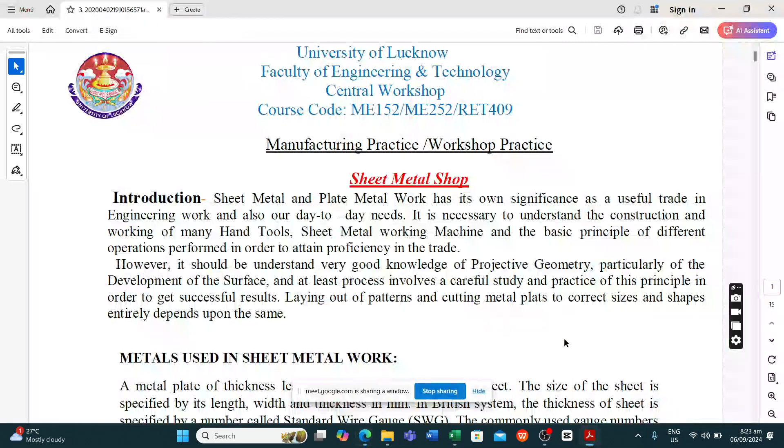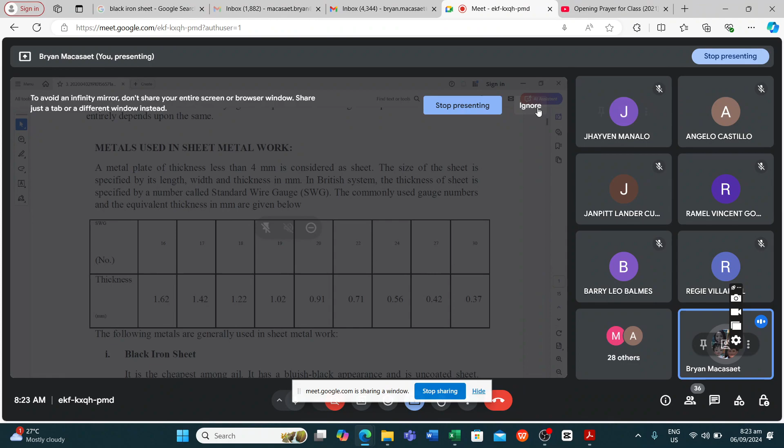So a metal plate of thickness less than 4 mm is considered a sheet, as we discussed earlier. The size of the sheet is specified by its length, width, and thickness in mm. The thickness of the sheet is specified by a number called SWG, or the standard wire gauge. The commonly used gauge numbers and their equivalent thicknesses in mm are given below. As you can see in the picture, the gauge numbers are 16, 17, 18, 19, 20, 22, 24, 27, and 30, and the equivalent thicknesses are 1.62, 1.42, 1.22, and 0.37.

So what did we say last meeting - the higher the number, the thicker or the thinner?

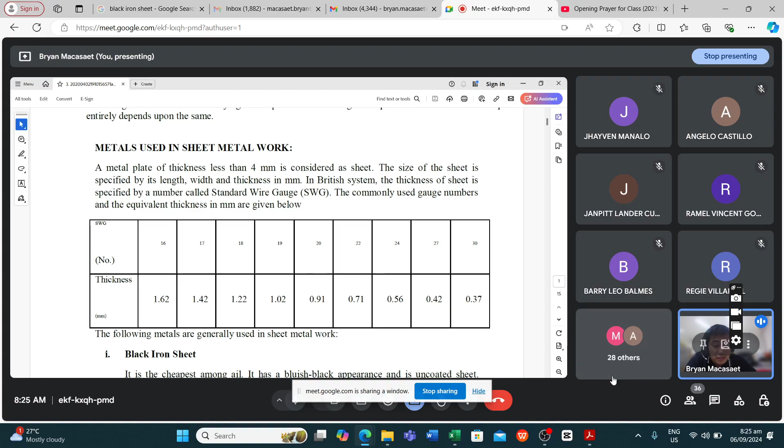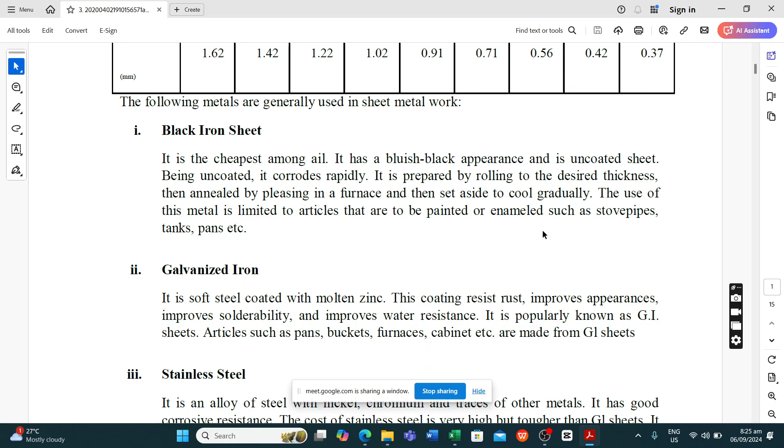So black iron sheet is the first of the following metals used in sheet metal work. When we say black iron sheet, it is the cheapest among all. It has a bluish black appearance, hence the name, and is an uncoated sheet. Being uncoated, it corrodes rapidly, so it is prepared by rolling to the desired thickness, then annealed by placing in a furnace, and set aside to cool gradually. The use of this metal is limited to articles that are to be painted or enameled, such as stovepipes, tanks, pans, etc. Let me show the picture of black iron sheet.

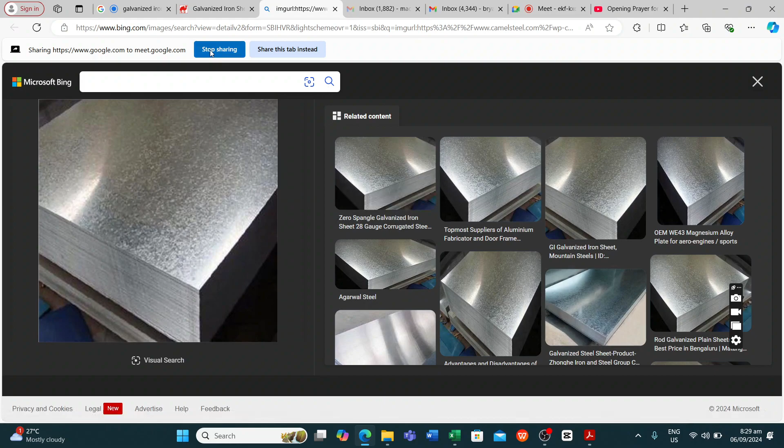Okay, next. So after galvanized iron, we have stainless steel. Okay, someone is raising his hand. Mamaya na yung mga late ha, mamaya ako mag-check ng attendance para sa inyo. Okay, stainless steel. It is an alloy of steel with nickel, chromium, and traces of other metals. It has good corrosive resistance. The cost of stainless steel is very high but tougher than GI sheets. It is used in kitchenware, food handling equipment, and chemical plants.

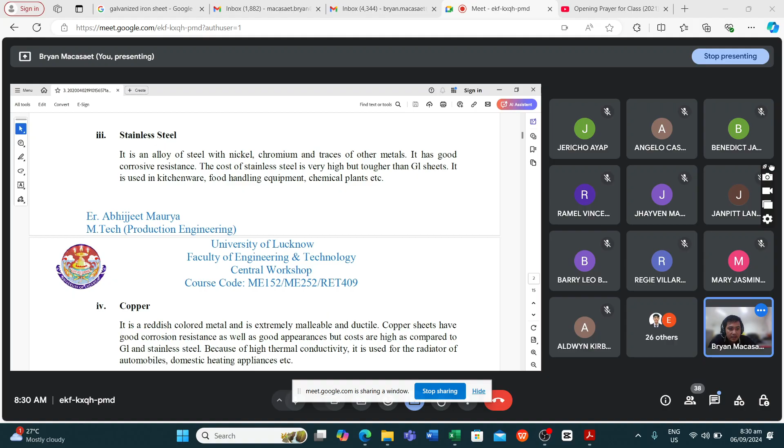Okay, so copper, napakita ko na rin sa inyo nung last meeting, di ba? No? So copper is a reddish-colored metal and extremely malleable and ductile. Copper sheets have good corrosion resistance as well as good appearance, but costs are high as compared to GI and stainless steel. Because of high thermal conductivity, it is used for the radiator of automobiles, domestic heating appliances, etc.

Next, we have aluminum, or aluminium in other spelling. Aluminum cannot be used in its pure form, but it is used in alloy form. Commonly, additions are copper, silicon, manganese, and iron. It has many qualities like high ratio of strength to weight, corrosion-resistant qualities, ease in fabrication, and whitish color. It is used in manufacturing a number of products such as refrigerator trays, household appliances, lighting fixtures, window work, construction of airplanes, and in many electrical and transportation industries.

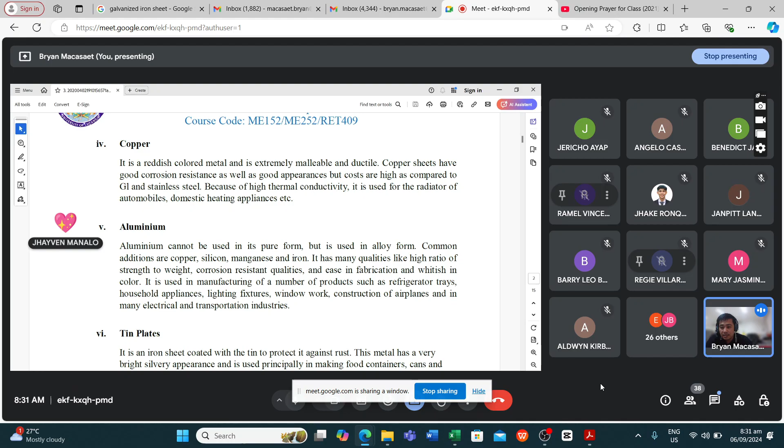Okay, thank you, Jhayven. Next, we have tin plates. The tin plate is an iron sheet with tin to protect it against rust. Its common applications are in cans, food containers, and pans. And then lead. It is very soft, malleable, low melting point, and possesses high resistance to acid corrosion. It has low mechanical strength, so it is used to provide lining to highly corrosive acid tanks, and is also used in radiation shielding.

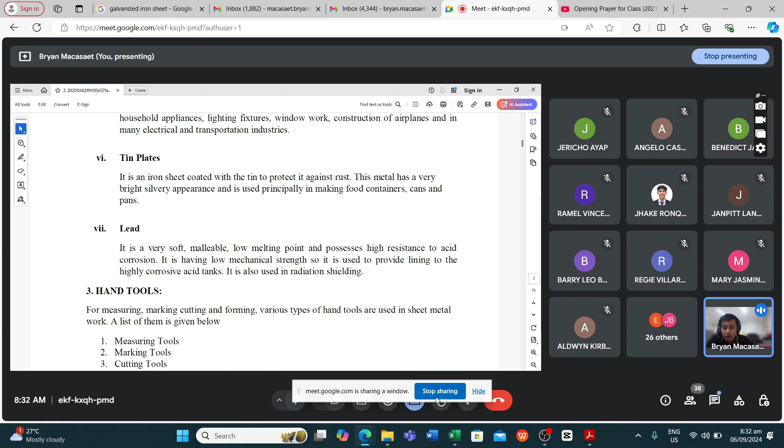Okay po, so let us look at the pictures of the sheet metals I mentioned. Okay, saan tayo natapos? Stainless steel, ano? So I will be showing you the image of stainless steel.

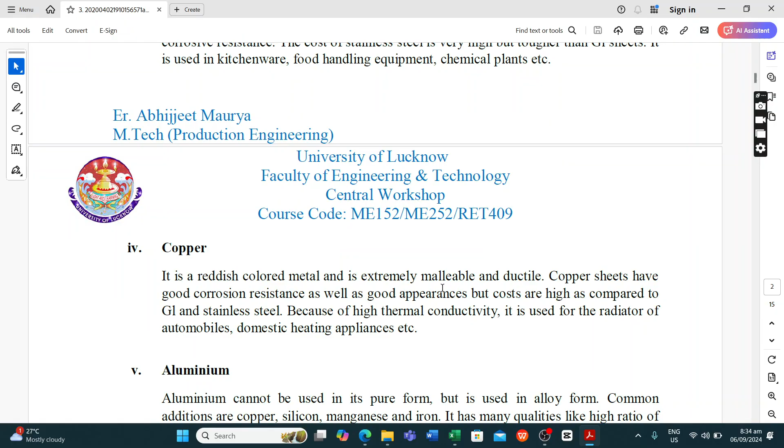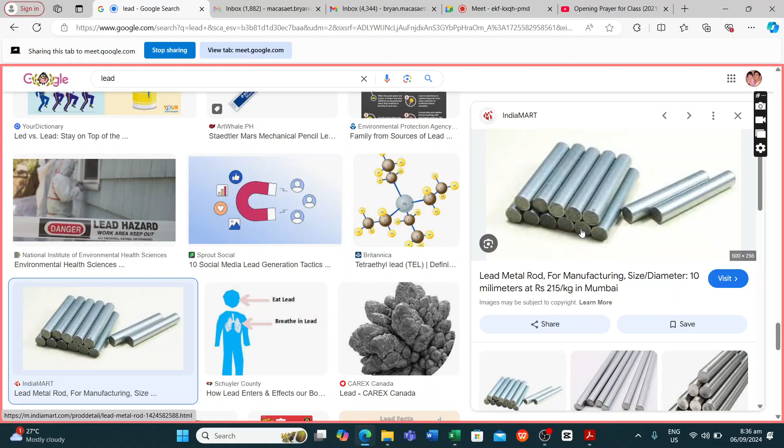Okay po. Okay pa, so do you have questions on metal types used in sheet metal production?

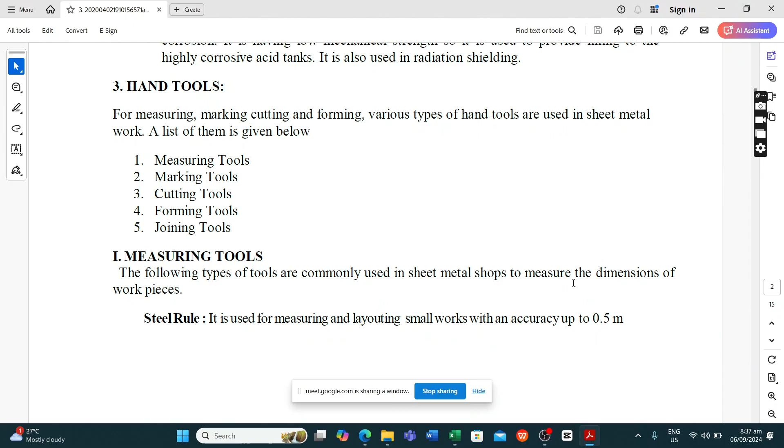Okay, so we will now proceed with the next topic, which is the use of different tools. So in this section, we will be studying the different types of tools that we use in sheet metal works. This hand tools is also somehow connected to introduction to automotive technology, kasi meron sa component natin ng ating course information syllabus ay kasama ang hand tools. So for measuring, gagamitin din ang hand tools, especially for marking, cutting, and forming.

So we use several types of tools. Various types of hand tools are used in sheet metal work as listed on its type and functions. So syempre, hand tools differ for its intended purpose. Okay? So syempre meron tayong measuring tools. Measuring tools are tools used to measure dimensions of an object, for example, the length, the height, and the width of materials.

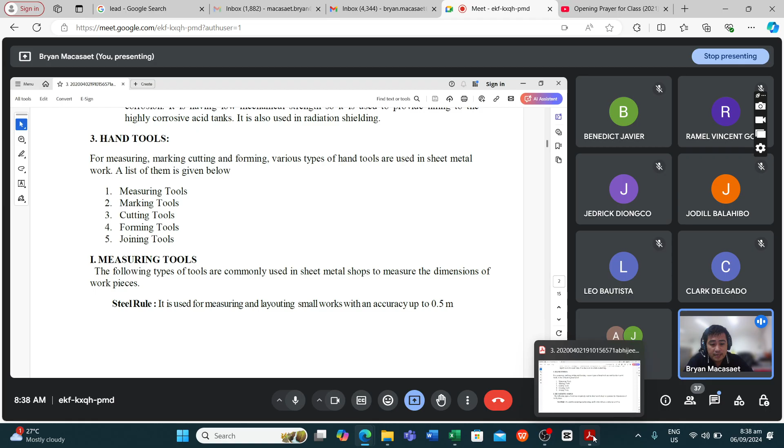So for example, initially sa plano or sa pagko-construct ng project, measuring is the first. After layouting, measuring ang sunod. Number 2, marking tools. Then number 3, cutting tools. Number 4, forming tools. And last is joining tools. Okay? So isa-isahin natin. The first one is the measuring tools.

Okay, from the word itself, measuring. It is a tools commonly used in sheet metal shops, used to measure the dimensions of work pieces. So meron tayong iba't ibang uri ng tools that we use for specific materials or components. Okay, the first measuring tools is what we call steel rule.

Ang iba ng tawag sa steel rule? Anong tawag niyo sa steel rule? Simple, ang ibang tawag ruler. Pero pagka steel rule, parang L shape. So it is used for measuring at layouting small works with accuracy up to 0.5 millimeter. Okay, ito yun, steel rule o ruler. Siya ay ruler made of steel.

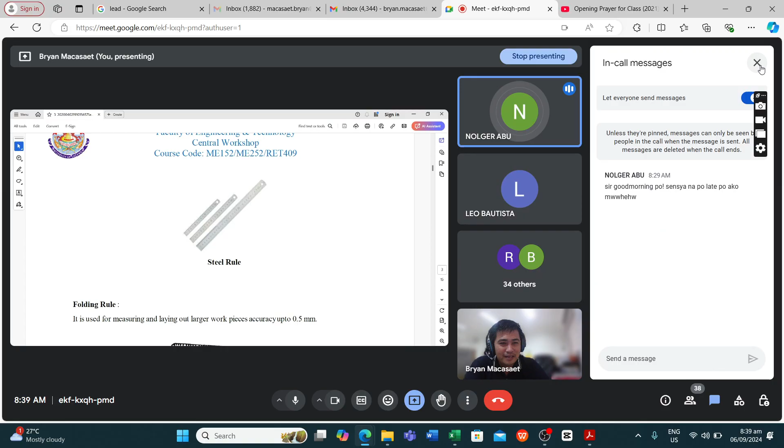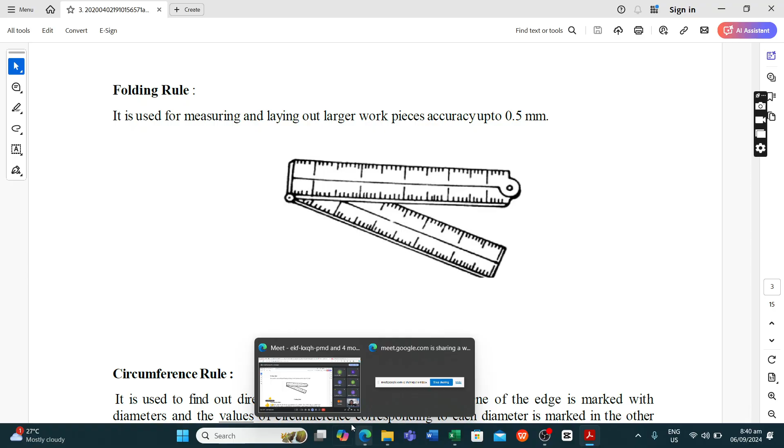Okay, number 2 is folding rule. Look at the picture. So this is used for measuring and laying out larger work pieces, accuracy up to 0.5. As you can see yung folding rule, okay, from the word itself, folding, nafo-fold yung ruler. So bakit kaya may folding rules?

Share his idea. Why do we need to use folding rule? Sige nga, Mr. Nolger Abu, can you explain the function of folding rule? Bakit may folding rule pa? Siguro po, sir, ginagamit po yan pag may pinagsulukan, sir. Yes, tama. Ganun po, anong gagawin sa pinagsulukan? Gagawa ka ng patayo at pahigang linya, so parang T-square. Opo. Okay, thank you, Nolger.

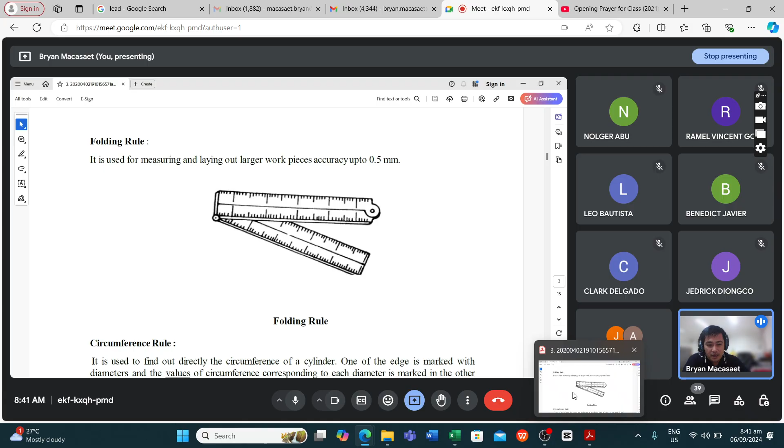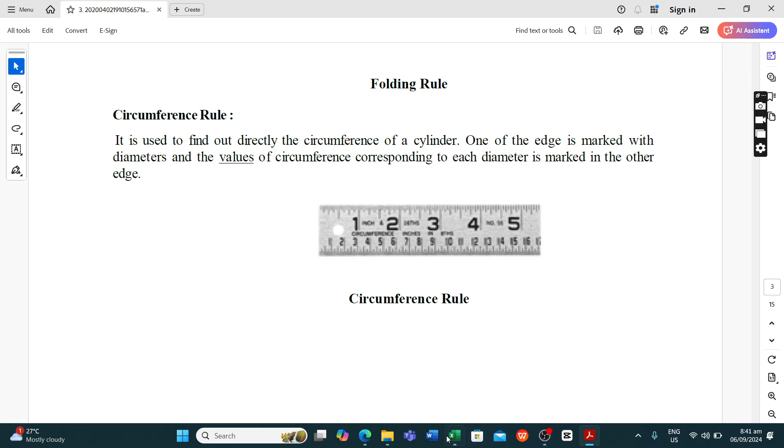Next, we have the circumference rule. It is used to find out directly the circumference of a cylinder. One of the edges is marked with diameters, and the values of circumference corresponding to each diameter is marked in the other edge. As you can see in the picture, yan yung circumference rule, pansukat na diameter ng cylinder. Okay po. So far, can you follow?

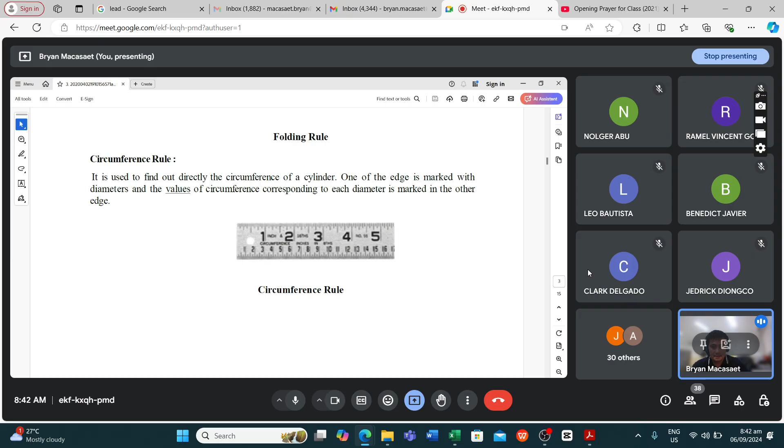Okay, next. May tanong sa circumference rule? Wala po. Next, we have the vernier caliper.

Okay, yan yung ating vernier caliper. As you can see in the picture, it is used for measuring dimensions. Also, it has corresponding parts. Kita ba yung arrow ko na gumagalaw? Ito ay ginagamit to measure depth, lalim.

Ito namang isa, yung nasa taas, it is used to measure internal diameter, ibig sabihin panloob. At itong dalawang ito naman, it is used to measure outside diameter. Nakuha?

Nakuha po? Opo. Ito ay outside diameter, ito ay inside diameter, ito ay depth. Ano pag sinabing depth? Lalim. At dito binabasa yung measurement.

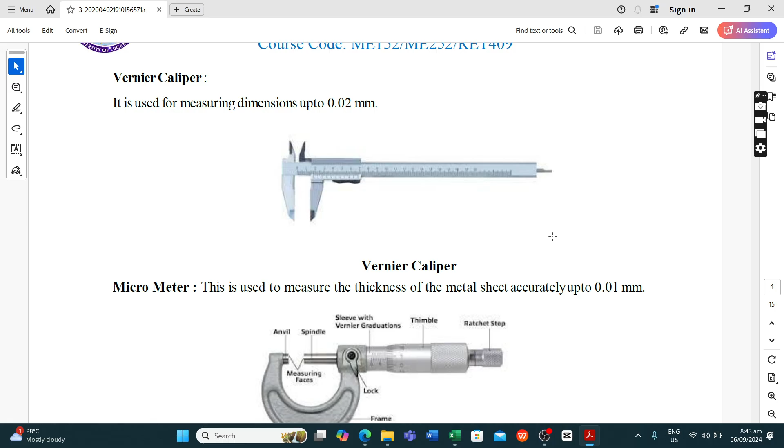Magiging activity natin siya sa hand tools o sa introduction to automotive engineering technology. Ngayon ay theoretical lang, description lang muna. Okay po, nakuha ang vernier caliper. Ibig sabihin ang vernier caliper ay may three dimensions na minimeasure: inside diameter, outside diameter, at depth o lalim.

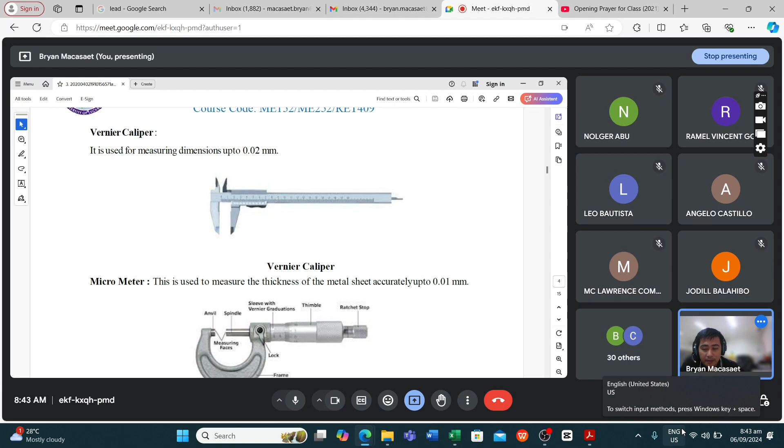Okay, next we have micrometer. This is used to measure the thickness of the metal sheet accurately up to 0.01 mm. Ito lang ang minimeasure niya, yung kapal ng metal.

Meron siyang several parts: anvil, spindle, measuring faces, sleeve with vernier graduation. Dito naman binabasa yung reading. Kita ba yung arrow ko?

Dito nilalagay yung minimeasure, at ito yung ratchet stop, at thimble. May tanong po sa micrometer?

Wala po. Micrometer is used to measure outside diameter lang.

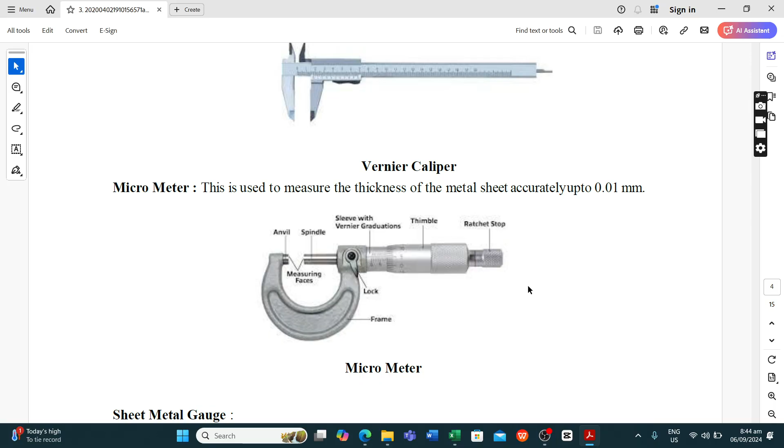Okay, next we have sheet metal gauge. It is used to measure the thickness of the sheet metal. Meron siyang various thicknesses, from 1 to 30.

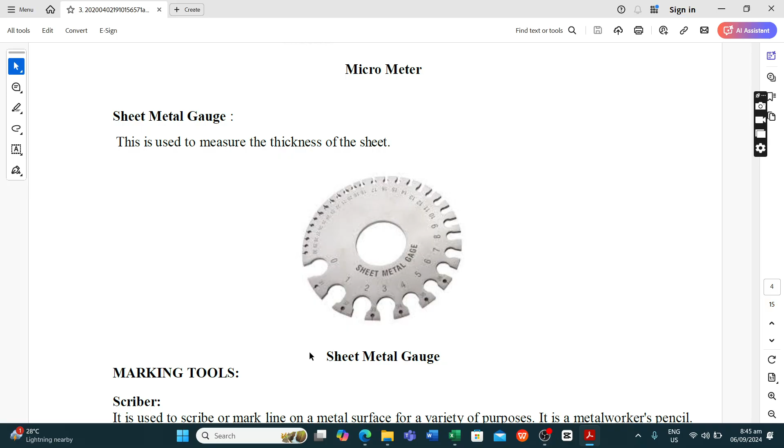Dito makikita yung kapal. Dito isisingit yung sheet metal para ma-measure yung kapal. Ito yung sheet metal gauge, from the word itself, it is used to measure the thickness of the sheet, kapal ng sheet.

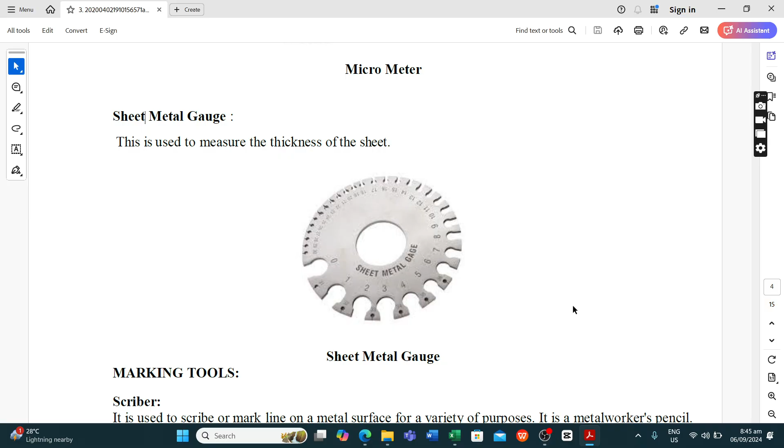May tanong sa sheet metal gauge? Okay, thank you for the response. Next, we have marking tools.

From the word itself, it is the tools used to mark an object by putting a line or scribing the surface of a material. It is used to scribe or mark a line on a metal surface for a variety of purposes, a metal worker's pencil. Kumbaga, siya ay pang mark o pang tanda.

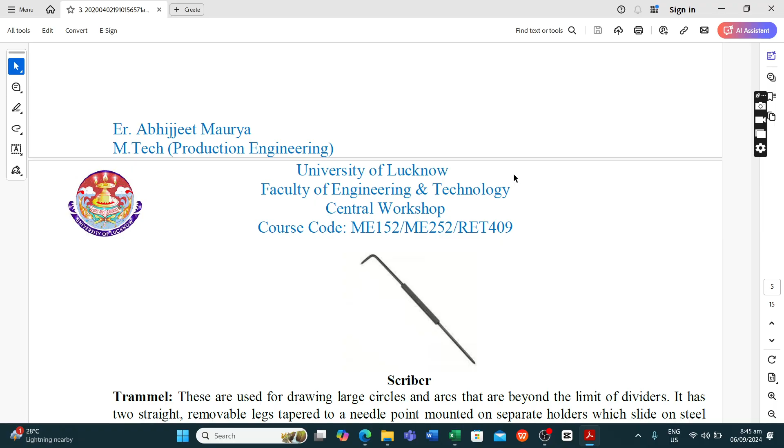Ano, the first one is the scriber. Ito yun. Sunod, yung tinatawag nating trammel, ito yun.

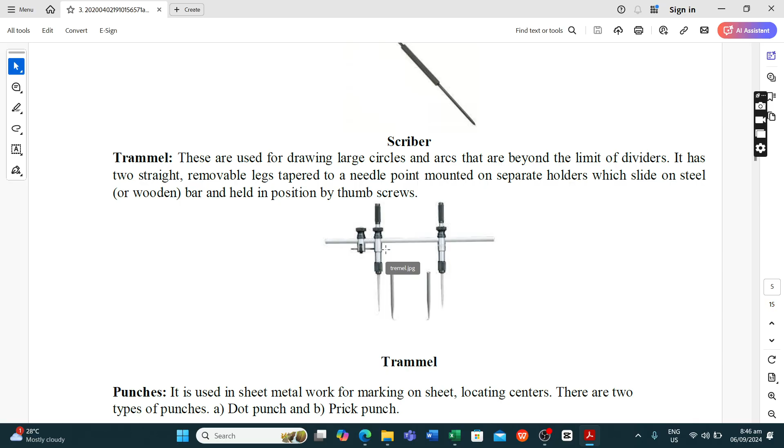Ang trammel ay used for drawing large circles and arcs that are beyond the limit of dividers. It has two straight, removable legs tapered to a needle point, mounted on separate holders which slide on steel or wooden bar and held in position by thumb screws.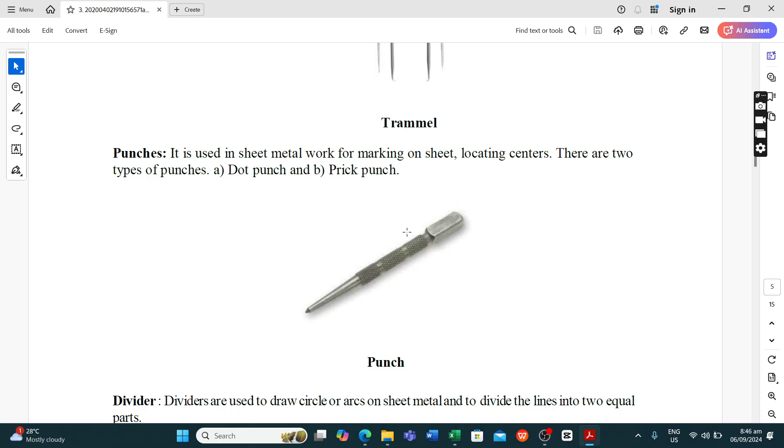Next, punches. Ito naman yung punches natin. It is used in sheet metal work for marking on sheet, locating centers. There are two types of punches: the dot punch and prick punch.

Next, divider. Dividers are used to draw circles or arcs on sheet metals and to divide lines into two equal parts. Ang dividers, kung tayo nung elementary at high school, parang compass na ginagamit sa paggawa ng circle at paggawa ng arcs.

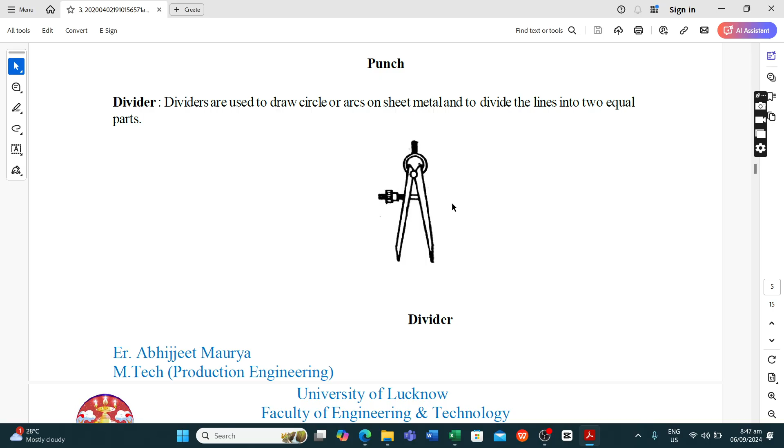Questions? Wala po, wala na po. Madali lang naman yung topic, kaya for sure wala naman kayong masyadong tanong.

The next one is what we call cutting tools. It is used to cut sheet metal as per the pattern drawn and to make holes for rivets. The following types of tools are used.

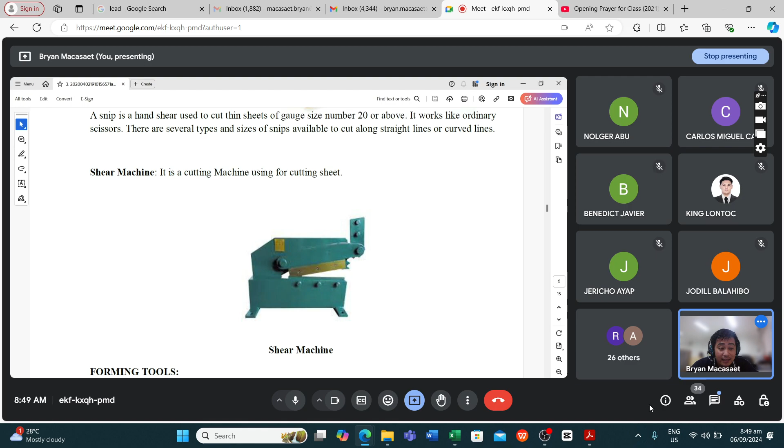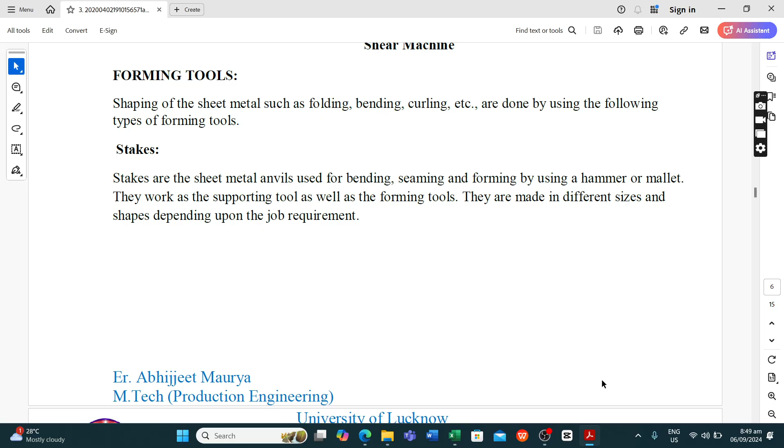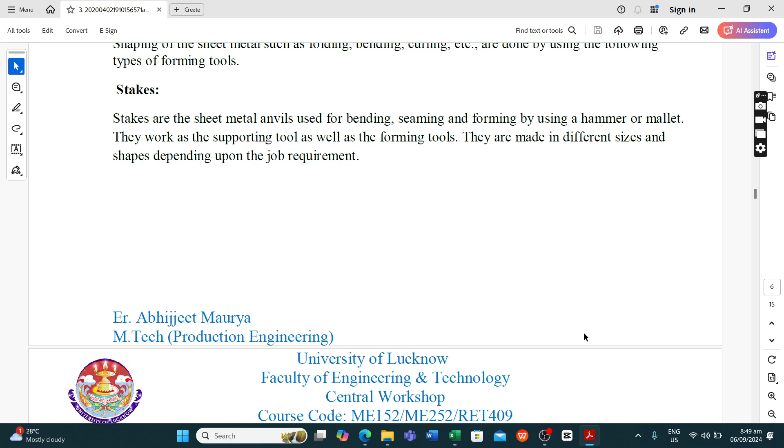Next we have forming tools. So shaping of the sheet metal such as folding, bending, curling are done by using the following types of forming tools. First, we have the stakes. Stakes are the sheet metal anvils used for bending, seaming, and forming by using a hammer or mallet. They work as supporting tools as well as forming tools, made in different sizes and shapes depending upon the job requirement.

Stakes, this is how they look. We also use different types of stake holders. The stake holder used in sheet metal shop is a rectangular bench plate.

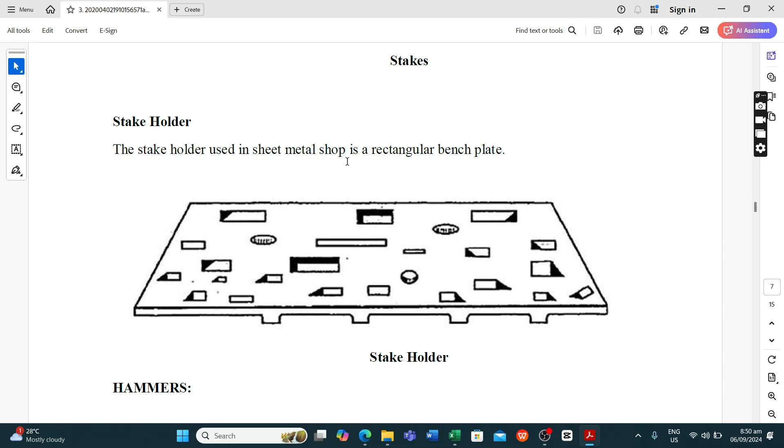After stakes, we have hammers. This is probably the most common tool we know. Hammer is used for hammering or striking, 'pampukpok' in Tagalog. That's why our parents, when they asked what our fathers did - hammering, using a martilyo, you need to pound. The sheet metal is shaped by hammering and striking with the mallet.

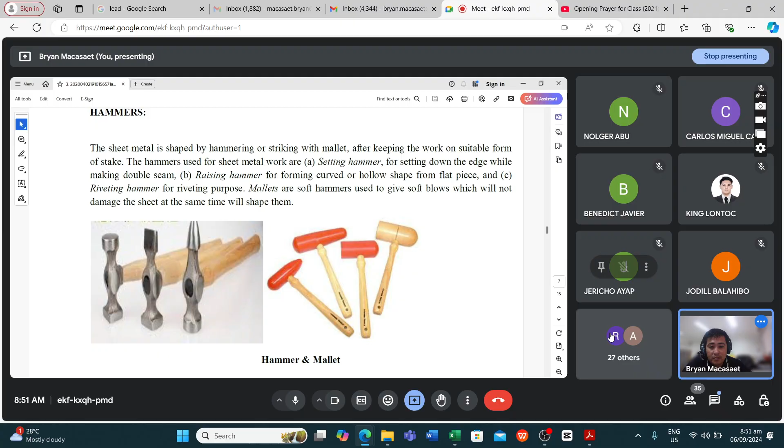After keeping the work on a suitable stake, the hammers used for sheet metal work are the following: the setting hammer, for setting down the edge while making double seam; the raising hammer, for forming curve or hollow shape from a flat piece; and the riveting hammer, for riveting purposes. Mallets are soft hammers used to give soft blows which will not damage the sheet while still shaping them. So these are our hammers.

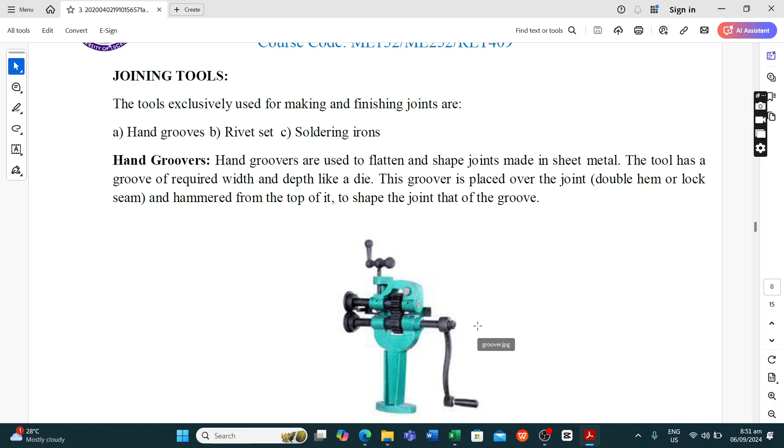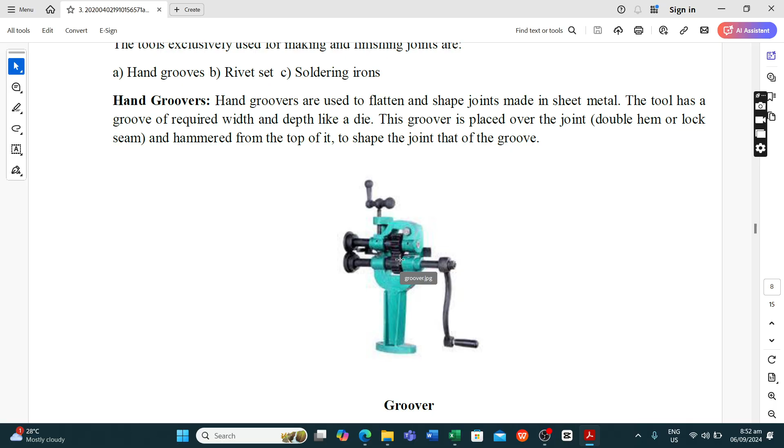You insert it here. The tool has a groove of required width and depth like a die. This groover is placed over the joint, double hem or lock seam, and hammered from the top of it to shape the joint of the groove. This is the groover. I insert the sheet metal here to make it flatten or flat.

Next we have the rivet set. You will also use this, the riveter. The rivet set is made of tool steel. At the bottom of the rivet set, there is a deep hole and a cup-shaped hole. The deep hole is used to draw a rivet through sheet metal, and the cup-shaped hole is used to form the finished head of the rivet. Another hole on the side of the set is to release the burrs that are punched.

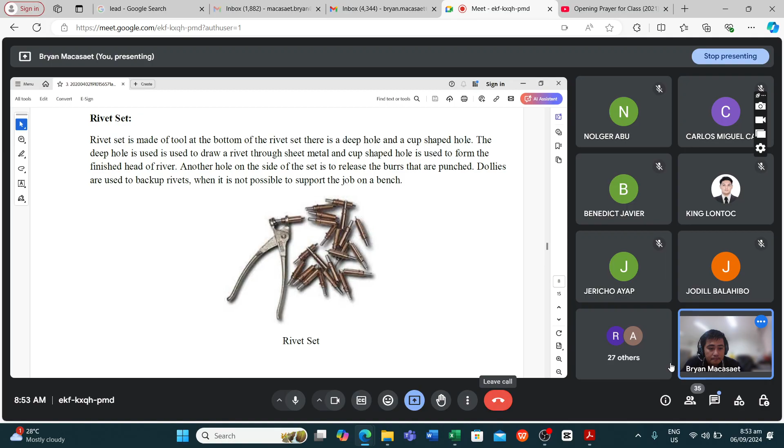Dollies are used to back up rivets when it is not possible to support the job on a bench. This is the riveter, and these are the rivets. Does anyone have a question about the rivet? None? Okay, it's easy anyway.

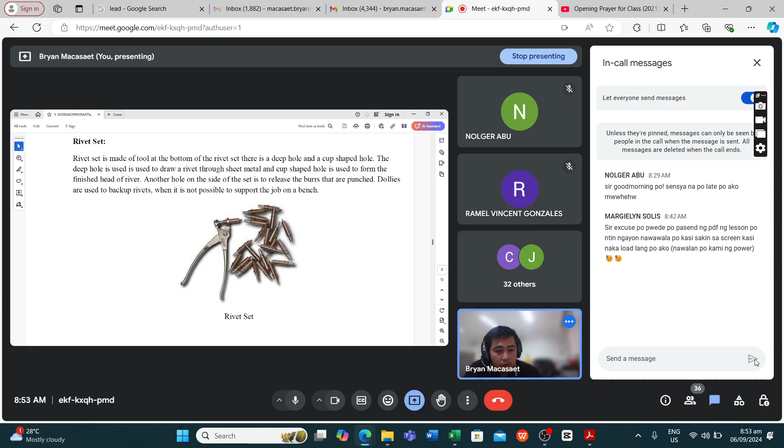Let me try attaching this. Then next, soldering iron.

Soldering iron consists of a copper block fixed on an iron rod with a wooden handle, as you can see in the picture, and it's made in various shapes and sizes to suit the use shown in the figure.

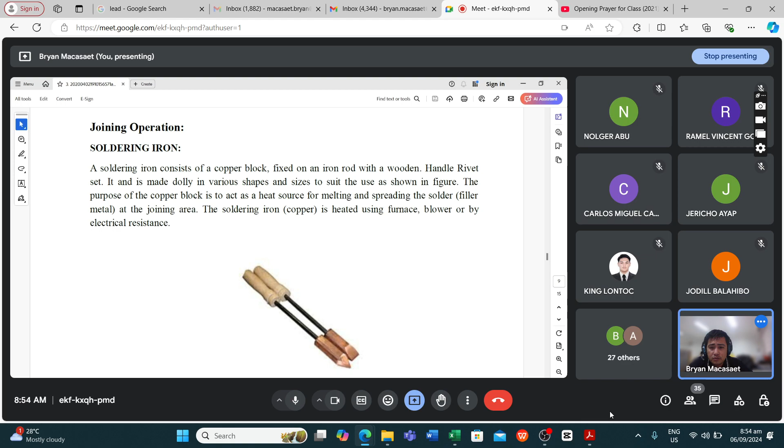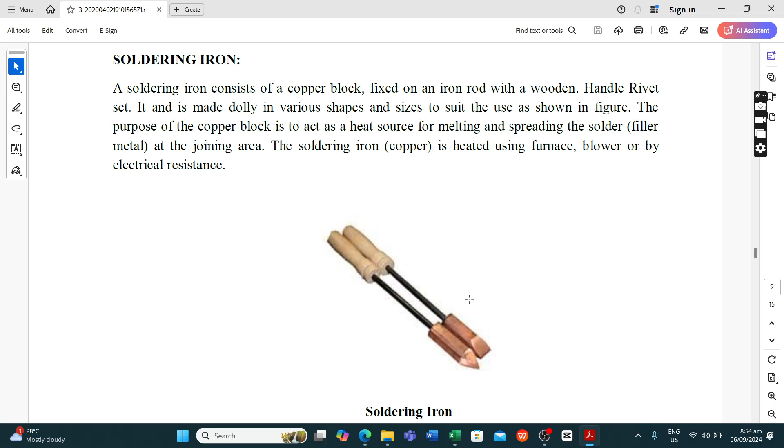This is our soldering iron, but there are more modern looks for soldering irons now, not just like this. The purpose of the copper block is to act as the heat source for melting and spreading solder. The soldering iron is heated using a furnace, blower, or electrical resistance. There are different styles of soldering iron used for joining. Any questions so far? None, sir. Okay, thank you.

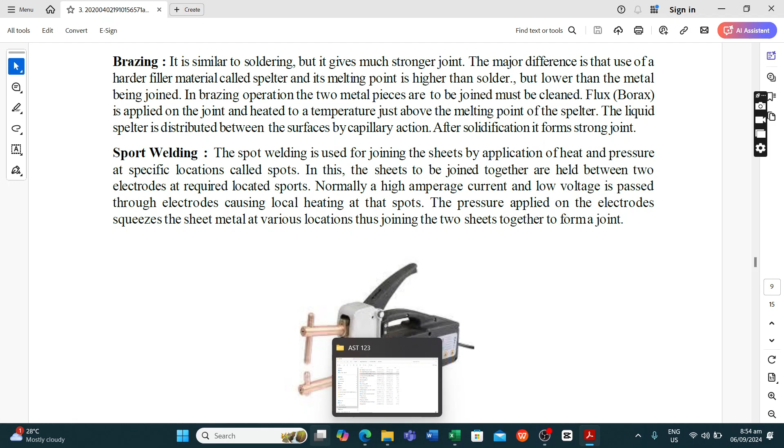Next is brazing. Soldering and brazing are often grouped together. Brazing is similar to soldering, but it gives a much stronger joint. The major difference is the use of a harder filler material called spelter. Its melting point is higher than solder, but lower than the metal being joined. In brazing operation, the two metal pieces to be joined must be cleaned. We use flux or borax applied on the joint and heated to a temperature just above the melting point of the spelter. Brazing is commonly used for joining rods in aircon units.

Aircon rod, yung ano doon, yung mga tubo-tubo. The liquid spelter is distributed between the surfaces by capillary action. So after solidification, it forms a strong joint.

Next, we have spot welding. Spot welding is used for joining sheets by application of heat and pressure at specific locations called spots. Ang ibig sabihin ng spot, yung ano lang, tick-tick-tick lang. In this process, the sheets to be joined together are held between two electrodes at the required located spots.

Normally, a high amperage current and low voltage is passed through the electrodes, causing local heating at the spots. So the pressure applied on the electrodes squeezes the sheet metal at various locations, thus joining the two sheets together to form a joint. So ang spot welding, yun yung initial welding na tinatawag.

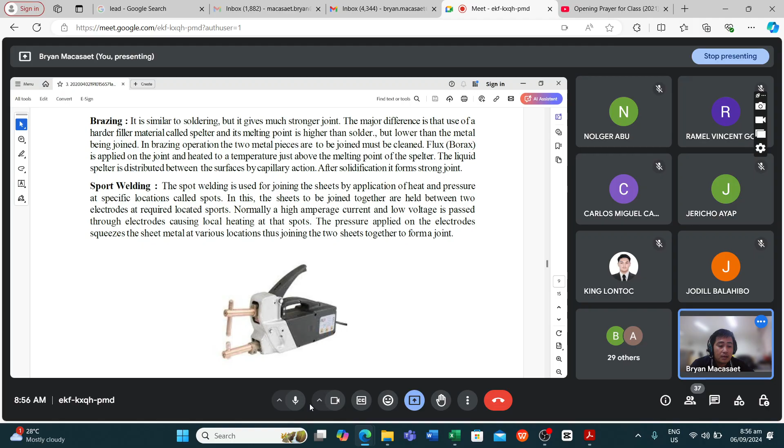Yung pang tick-tick lang na tinatawag. Okay po, may questions po sa spot welding? Wala po sir, wala po. Okay, sheet metal operation, yan.

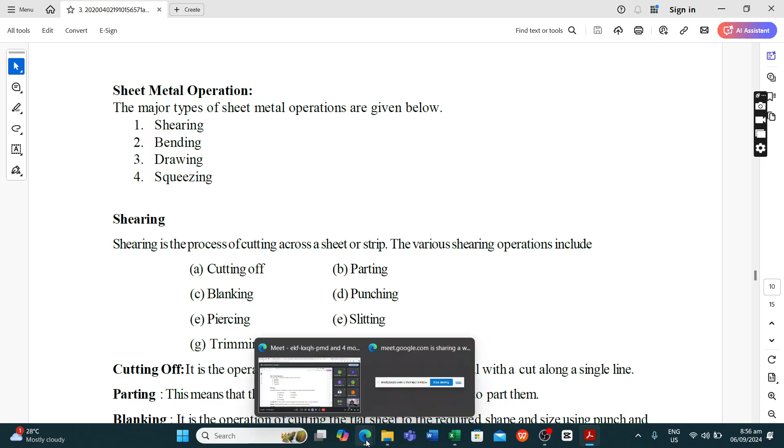So lumalapit na tayo ng lumalapit, ano. So kaya parang next week kaya nyo na mag activity. So next week sa ating face to face, you need to bring the following materials. Okay? So wait, type natin. Kasi tayo activity na.

Ililista nyo ha. Okay, so syempre we need to have the first material. So we have, okay, so ang una ay yung GI sheet. GI sheet gauge 20, and ang kanyang kapal ay 0.8 mm. Yun yung una, ano.

And then second, you need to have a round bar, 5/16 ang size. Okay, round bar. So yung round bar 5/16, siya ay manipis na bakal. Gagamitin nyo siya as handle ng inyong toolbox, pang handle.

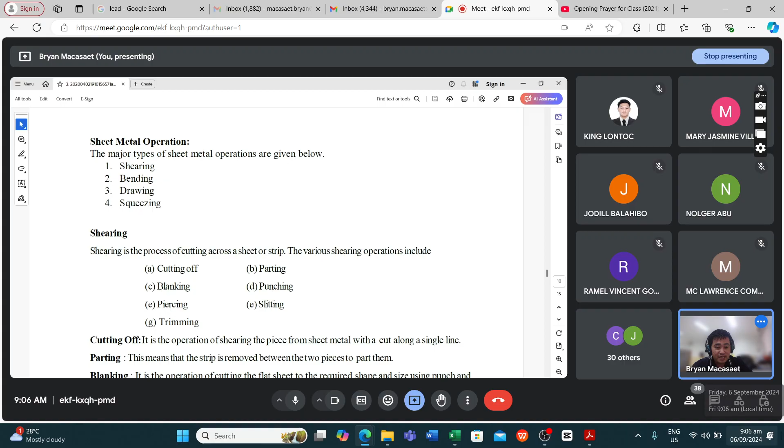So the first one is cutting off - of course, from the word itself, cutting off. Ibig sabihin, pagputol ng part. So it is the operation of shearing the piece from sheet metal with a cut along a single line.

Letter B, parting. Ibig sabihin, pagpaparte-parte sa Tagalog. So this means that the strip is removed between the two pieces to part them.

Next, blanking. Ito naman yung operation of cutting the flat sheet to the required shape and size using punch and die. Tawag doon, blanking - ibig sabihin, in-outline mo, tapos pinutol mo yung inilabas mo, blanking. So you use punch and die.

Sunod, punching. Hindi yan si Manny Pacquiao ha, punching. So punching is operation of making only circular holes in a sheet metal. Meron kang sheet metal, gagawa ka ng bilog, butas na bilog, ang tawag doon, punching.

Okay, iba pa yung drilling - we use the word drilling kapag nagbubutas tayo ng mga bakal. Pero pagka nagbubutas ng sheet metal, ang tawag ay punching. Nakuha nyo? You get the difference? So we use specifically the term punching pag sheet metal ang ginagawa ng circular holes. Pag manipis, punching. Pag makapal yung binubutas, appropriate ay drilling po.

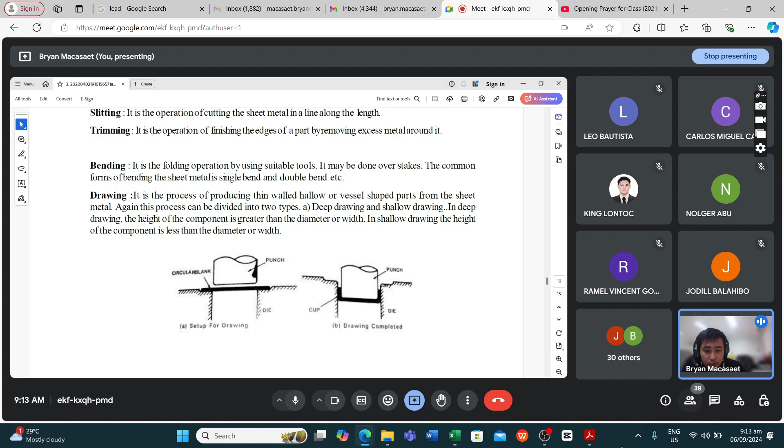Sunod, yung tinatawag nating drawing. Ito yung mga puro plano, hindi naman natutuloy. Drawing, ano? Joke lang, hindi. Kumbaga, pag sinabing drawing, sketch, layout, plans, designing.

So when we say drawing, it is the process of producing thin-walled hollow or vessel-shaped parts from the sheet metal. Again, this process can be divided into two processes. Ito yung tinutukoy na drawing ng sheet metal, hindi yung ating sinasabing mga planong hindi natuloy, tsaka yung mga drawing, layouting, hindi yan. Pero synonymously, kinokonek ko lang kung ano yung drawing.

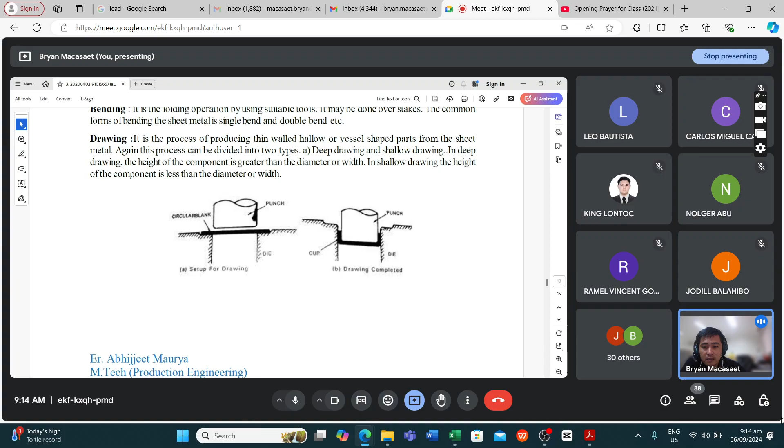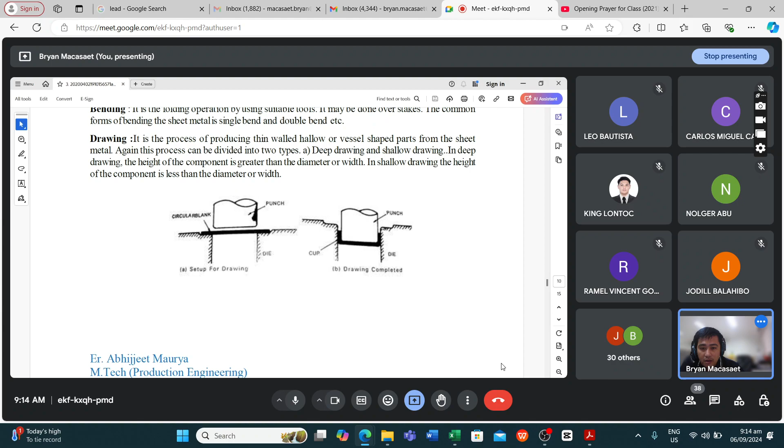Pero sa atin sa sheet metal, pag sinabing drawing, ito ay deep drawing at shallow drawing. Pag sinabing deep drawing, the height of the component is greater than the diameter or width. Ito yun, letter A. In shallow drawing, the height of the component is less than the diameter or width. Nakuha?

Yes po. Ang pinagkaiba, kapag deep drawing, yung height ng component ay greater than diameter or width. In shallow drawing, the height of the component is less than diameter or width. Ito yung example.

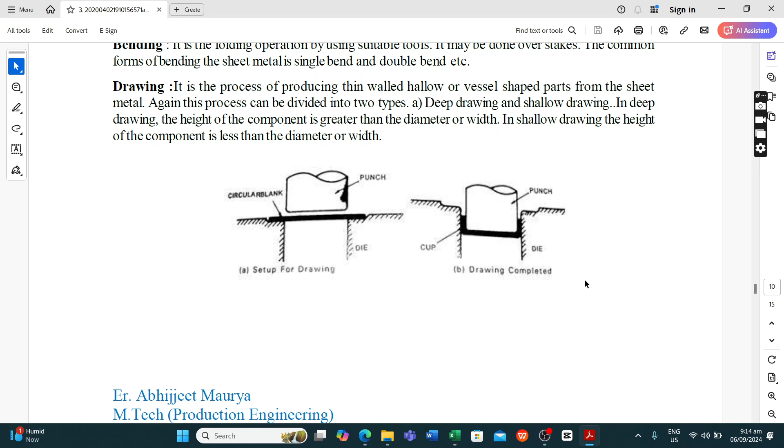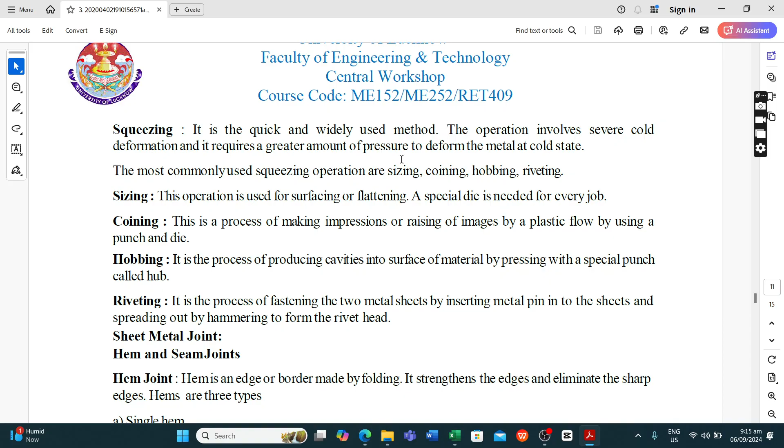Next is squeezing. So it is a quick and widely used method. The operation involves severe cold deformation and it requires a greater amount of pressure to deform the metal at cold state. So the most commonly squeezing operations are: sizing, coining, hobbing, and riveting.

Una, sizing. Okay, from the word itself, sizing, size. So this operation is used for surfacing or flattening. A special die is needed for every job.

Number 2, coining. This is the process of making impressions or raising of images by plastic flow by using a punch and die.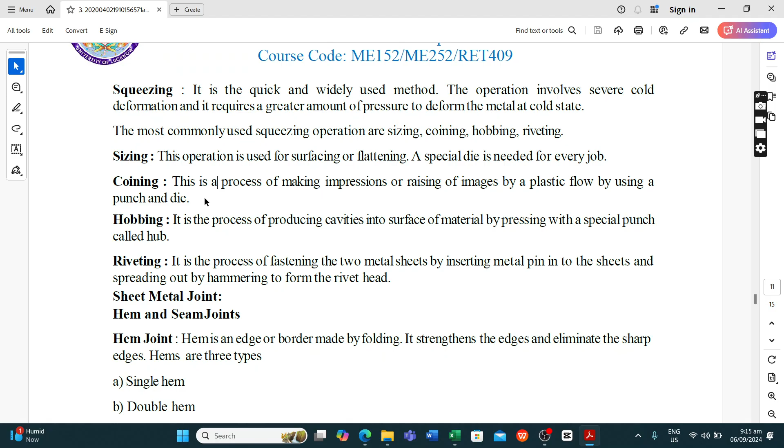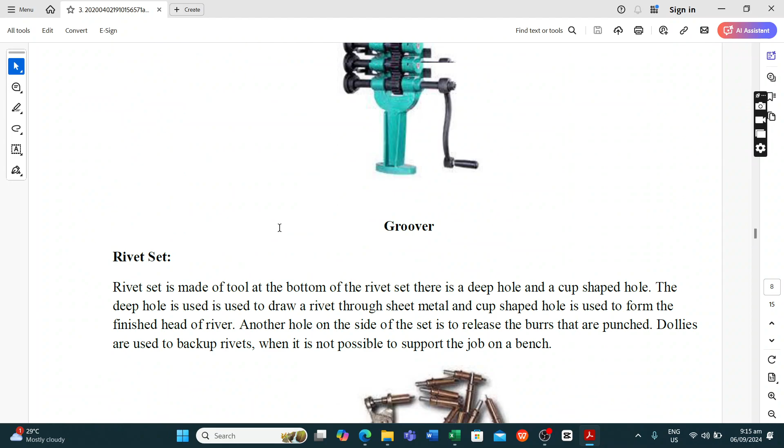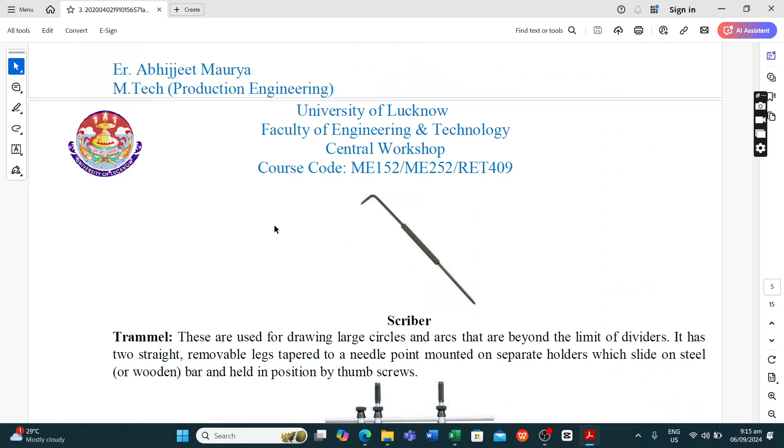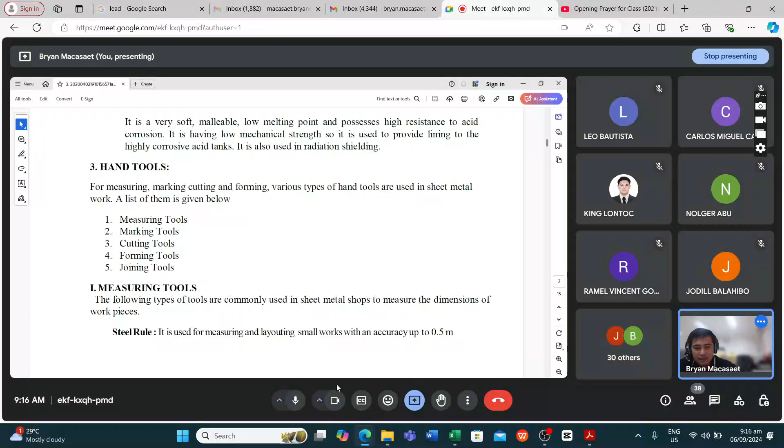So bago pala tayo lumaot, pakita ko muna pala yung mga tools, kasi meron palang presentation na ginawa ang IE para may idea tayo sa mga tools na ginagamit dito. Scriber, meron din silang presentation, para naman hindi masayang yung kanilang ginawang output last year. I'll be sharing itong mga tools na ito. Wait lang, pakita ko sa inyo yung mga tools.

Kompleto ito, ano. Kompleto yung output ng mga IE ko nung last year. So, from hammers to screwdriver, shears, chisel, drill files, hacksaw, layout tools, pliers, wrenches, bench work, drills, drilling, hacksaw — nandito yun. So I'll be playing the presentation, and then by and by, pwede kayong mag-jot down as a reference. Okay, let us play.